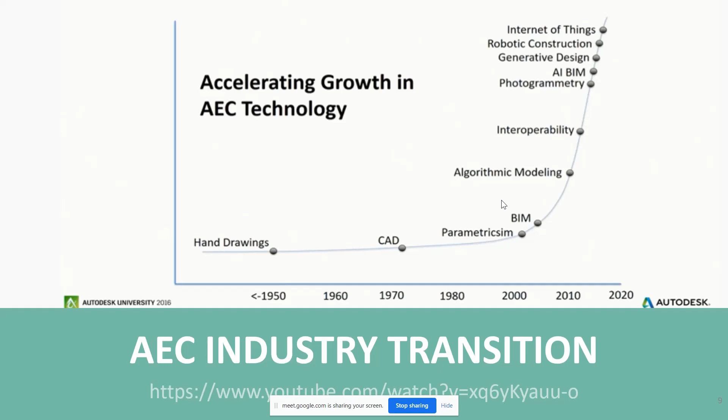Later on, in 1970, they transitioned to CAD, which is also known as computer-aided design. CAD is nothing but the digitization of hand drawings.

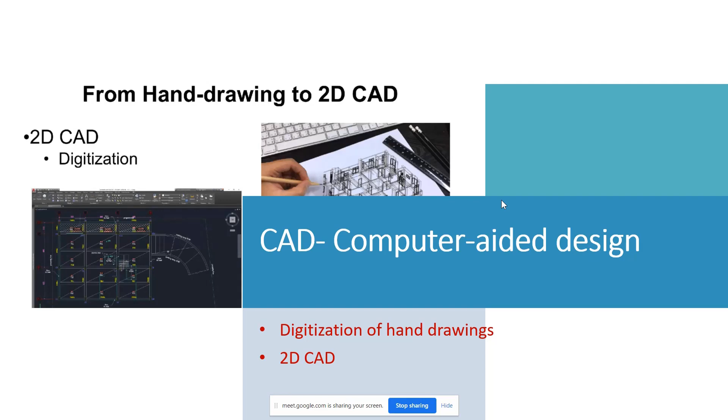The researchers invented CAD, and later all the designers shifted towards CAD, which helped them reduce a lot of paperwork and developed an opportunity to go towards more complex designs, which we call parametric design. Parametric design deals with complex designs, complex structures, where the model requires more mathematical equations and more parameters, more dependent and independent variables in the equations. Later on, designers, architects and engineers came to know that for larger scale projects, 2D and 3D design was not enough. They needed more information, more CAD softwares that could handle complex designs, so they transitioned towards algorithmic modeling, where more equations and mathematical parameters come into play in designing the models.

So that's what we call parametric design. And later on, more information was added to the models, which gave rise to building information modeling, later in 2005-2007 onwards. In this workflow, interoperability was the key function.

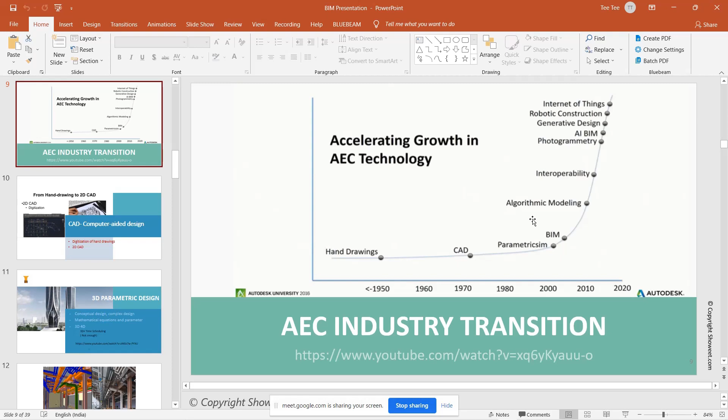So that is basically how the AEC industry has been transitioning over the last 20 years. BIM is one of the processes, one of the stages in that transitioning period. If we look into BIM, it requires a lot of information to make it possible for you to understand all the clashes or all the issues before being constructed on the real ground.

One thing you need to understand is the dimensions in BIM, the dimensions in our AEC industry. Presently, we have 7 dimensions. I hope all of you are aware of 3D modeling, the X, Y, and Z coordinates. If you add the time schedules to the 3D model, it becomes 4D, 4-dimension. And if you add the cost scheduling to that 4-dimension, it becomes 5-dimension.

There are also 6 and 7-dimension. The 6-dimension is when you add all the information about analysis - the energy analysis, the HVAC system, the amount of light entering your room, or the analysis of wind and flood. If you include all this analysis of how well your project is sustaining into its environment, that is the 6th dimension of BIM. The 7th dimension deals with maintenance purposes, the warranty card that comes with your building component, like how often you should change it and what are the life cycles of your building components.

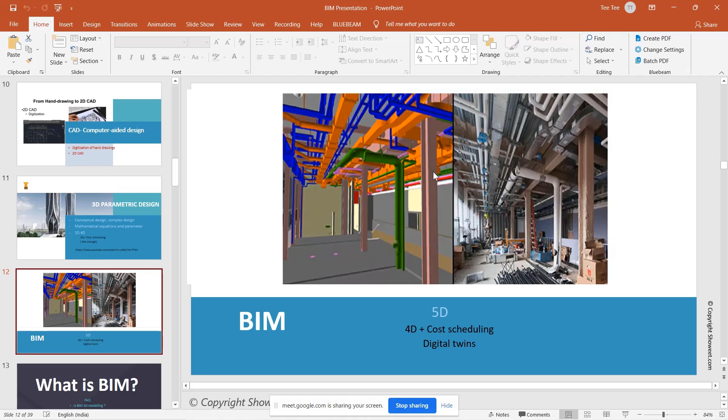This adds up to your 7th dimension. And if you want to know more about the dimensions, I have the resource in the resource folder, which I will share with you at the end of this session.

So what is BIM? The most frequently asked questions are like, is BIM what we call 3D modeling? Is that what BIM is? Or is BIM itself a software that has all the functionality in that one software that you can use and have the output?

Okay, thank you, sir.

So when you look into BIM, it is very important to understand the difference between a CAD model and a BIM model. If you look into these two models, one is a CAD model and another one is a BIM model. The CAD model is just the representation or geometric shape and form of the structure and nothing more.

But if you look into the BIM model, it is also a representation. It is also representing the geometric form and shape of the structure, but it also has information about the structure. It is not just the component, not just the representation of the component. If you look at the two walls here, one is the CAD model and another one is the BIM model.

The BIM model has information about the wall. The 3D CAD model is just the representation of the wall, but the BIM model has information like the length of the wall, how high it is, what different components make up this wall, like the core, the mortar, or the paint. So what are the different types of layers which make up this wall? It is basically having all the information necessary to construct this wall. That is what a BIM model is.

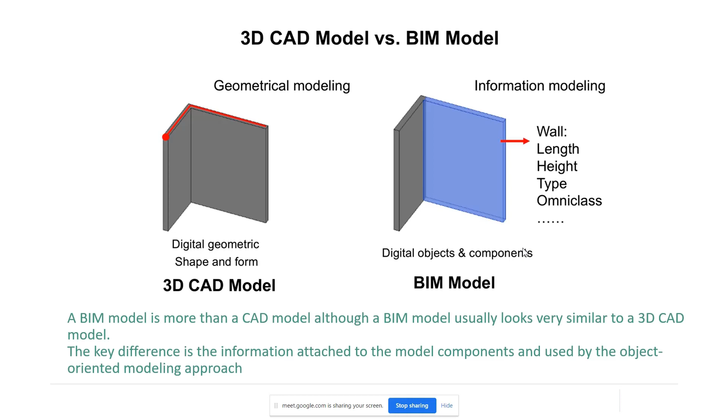Some different terminologies that are used for BIM include building information management. People also say it is the management of information, which is of course very true. And people also use building knowledge management, since it is not just the information that you have about the project.

You need a vast background, a lot of knowledge, just to provide a handful of information. That's why it's also called building knowledge management—it's all the information we have about the project for construction. That's why it's also termed construction information modeling. It's not limited to buildings; it can be used in any infra or civil works project, so it's also called civil works information modeling. But the baseline is, the more common term used is building information modeling.

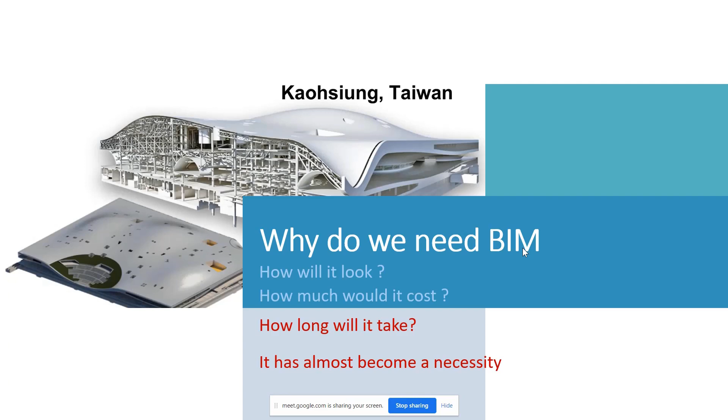So why do we need BIM? We really need to practice BIM because of its benefits. It will let you know how the project will look at the end of construction, how much it would cost, and how long it will take. BIM has all these benefits.

We need BIM because of present challenges—projects are becoming larger and more complicated, and we need faster, better quality, and safer delivery. We need to manage the full life cycle of the project, and BIM especially helps with operation and maintenance. Right now we just care about pre-construction and construction. Once the building is handed over, you're technically not responsible, but with a BIM model the owner can take responsibility for maintenance of components, minimizing cost for the contractor, designer, stakeholder, or owner.

So BIM is a new ability to manage information, to do digital simulation of the real world in cyberspace before constructing or operating the project in the real field, and it also helps better collaboration between designers.

Some benefits of BIM: it will automatically generate two-dimension detailings. You just need to model the BIM model as if constructing the project on the real field. Once you're done modeling, you can take a section from anywhere, and the 2D detailings will be automatically generated. The best thing is if you make any changes to the design later and update the BIM model, it will automatically be reflected in all the views, sheets, and layouts in your 2D detailings.

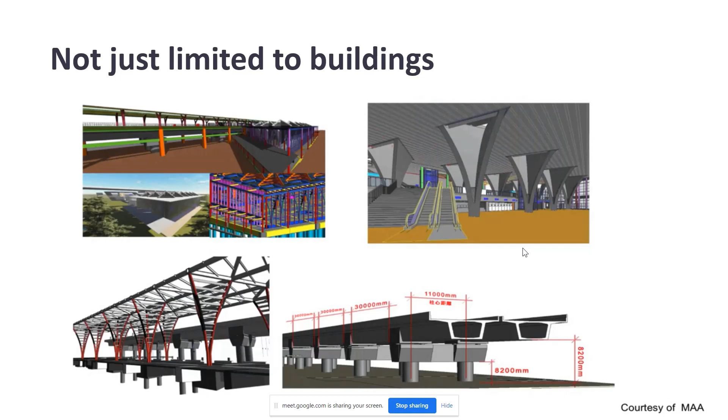BIM is not just limited to buildings—it can be used anywhere in infra works or civil work projects, like bridges, using a BIM model for bridges. Unfortunately we don't have a bridge expert here today, so maybe in the future we'll make similar content about bridge projects and BIM models.

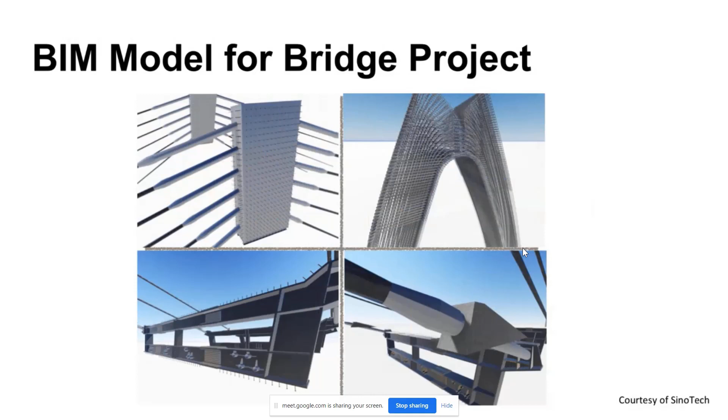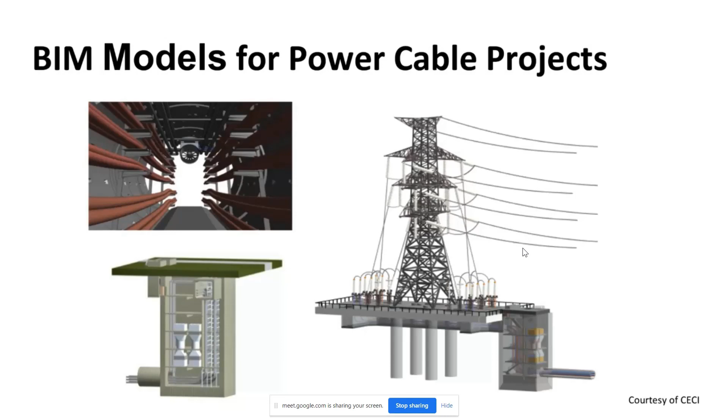We can also use BIM models for power line cables and power projects, where you can do underground design and use analysis functions to analyze power in transmission lines. The best thing is that it has the power to integrate multiple systems.

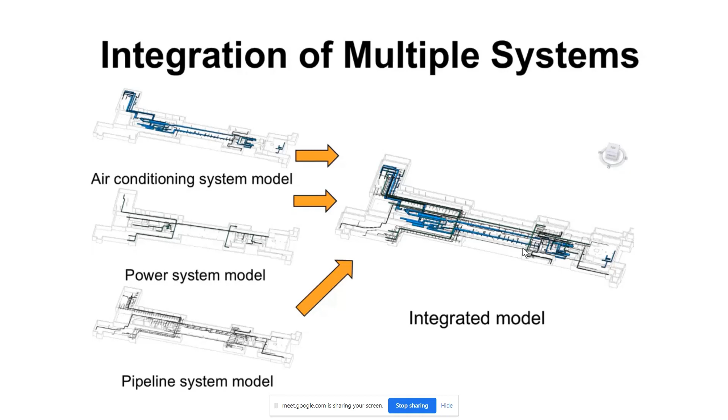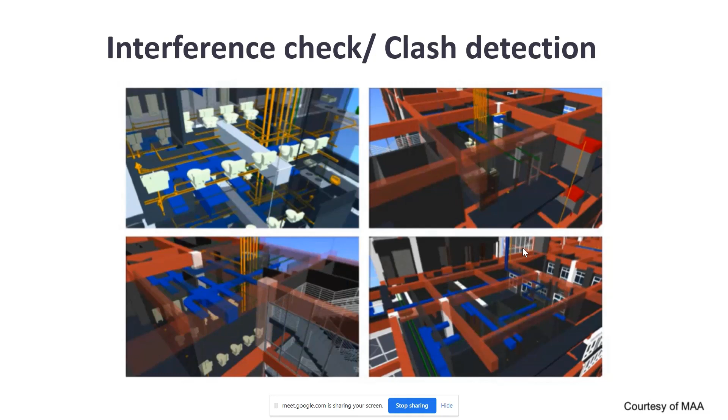All the top construction and design firms use BIM. They model the architectural model and distribute it among multidisciplinary engineers—structural, MEP, electrical. All the engineers work on the same model at the same time, each in their own field. Once done, they put it together in a master model and detect clashes—whether MEP members clash with structural walls or with other MEP members. Clashes can be detected beforehand, saving a lot of time and resources during project execution.

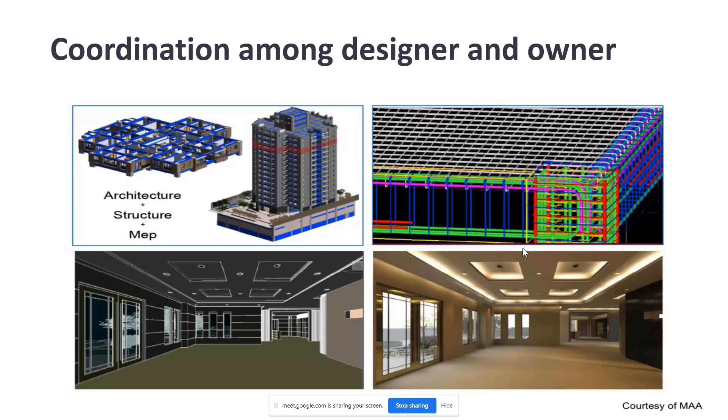BIM also coordinates among stakeholders and designers. Whether you want to change the design or keep it the same, you can discuss with stakeholders on the platform and incorporate any changes, showing them the design virtually before constructing it on the real ground. So the last benefit of BIM is that it acts as a platform where you can rehearse your project before executing it on the real ground.

Like how well your building is fitting in its surrounding, or how well your building is reacting towards all the environmental changes. So basically you can rehearse it, you can analyze your building before constructing it on the real ground.

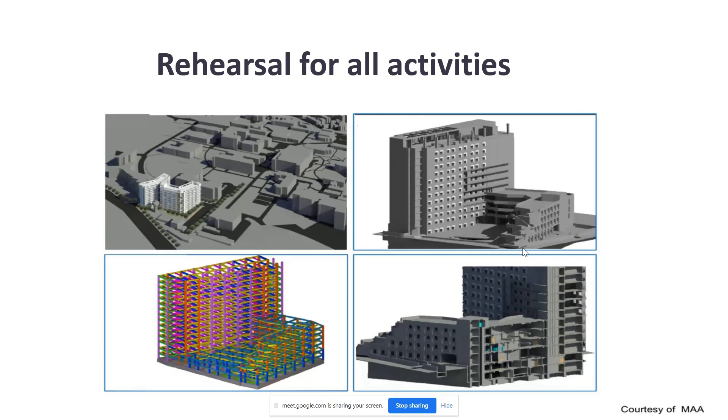Presently we are using virtual design and construction, also called VDC. But we are not bothering much about the information about this building, so we need to really consider the information that is required for the construction of the building.

So these are some of the benefits of BIM. And in order to achieve the full functionality of BIM, we need the right tools, the essential tools that we need to achieve the full functionality of this BIM process.

Today I have here 4 essential tools that we need for a successful BIM project. When you go advanced in BIM, there are lots of essential tools, but maybe we will look at it in the future. Today we have 4 essential tools.

First we have a BIM management platform, where this platform can manage all your files, all your plans, all your schedules, right from the inception of the project till the handing and taking of the project.

The second tool that we have is a common data environment, where you can share all the data with everyone you want. From that one platform, you can share and get access to the data with different levels of accessibility. The third tool that we need is the authoring tool that governs all the rest of the tools.

Because if you are an architect, you need a very powerful tool for 3D modeling. If you are a structural engineer, you need a powerful, user-friendly tool where you can save a lot of time in designing complex structures.